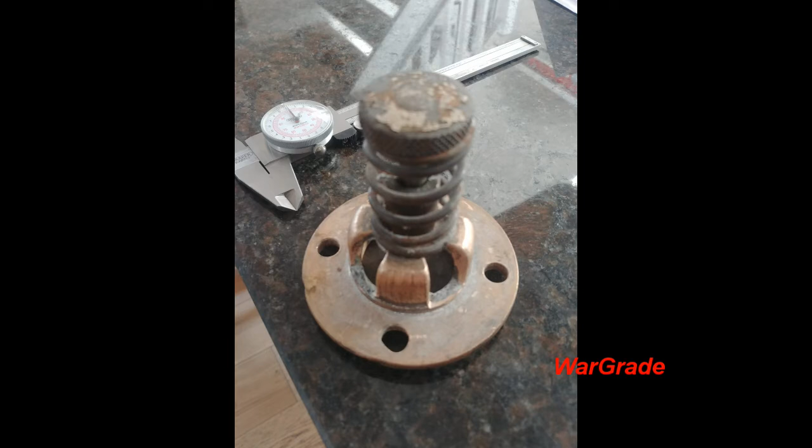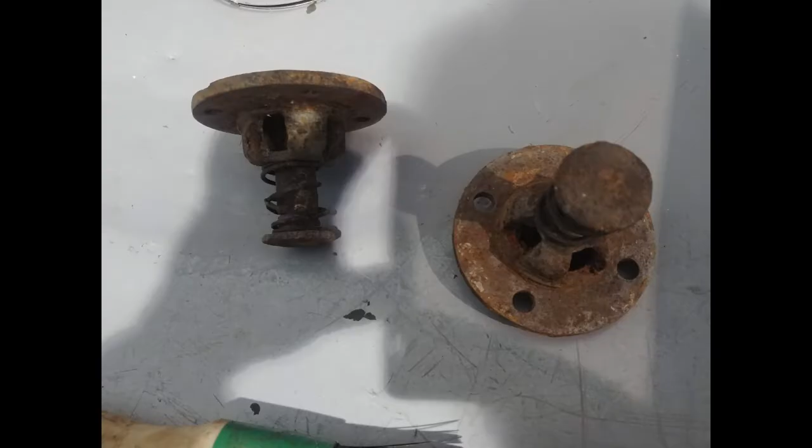So this is the drain bung fitted to the bottom of American World War II tanks. Sherman, Chaffee, Stuart, and I'm sure a few others as well. As you can see, it's in quite poor condition, or the other ones were. This one here is the one I've got to copy, and it's probably the best example I've ever seen, and it still actually works, which is quite amazing really, considering they're well over 75 years old now.

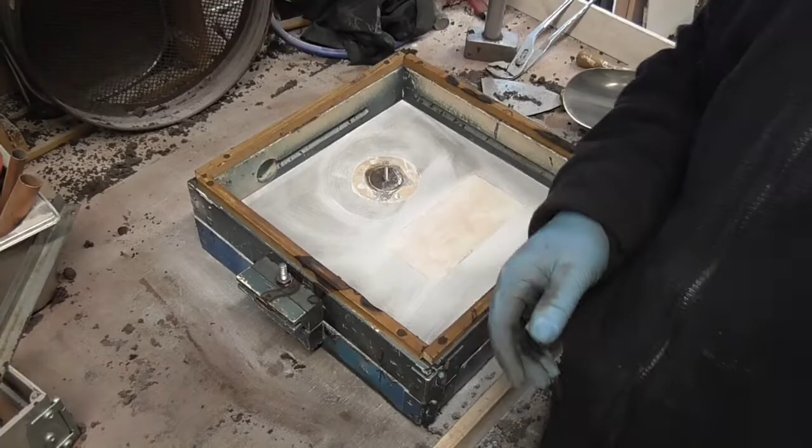Don't you just hate it when you spent the last 20 minutes talking to yourself? Happens to quite a lot of people quite a lot of the time. Yeah, you mainly.

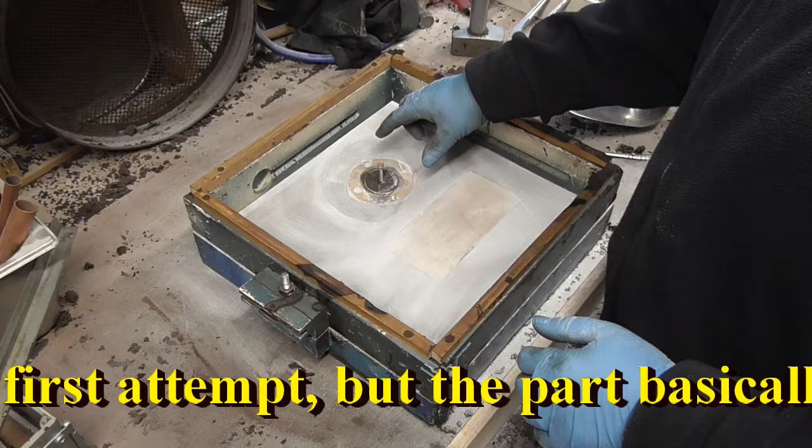So, I've got two experimental casts here. This one I don't expect to come out. It's quite an intricate little part. It's for a World War II tank. I'm going to be casting it in aluminium, as I do, because I've got quite a few of these to make.

And the original one, which is this, is not in too good a condition. So I'm just experimenting with this one to see how it fails, and I'm pretty sure it is going to fail. But I'm going to have a crack at it anyway. I'm doing this one, which should work out. I had a bit of space, I thought, well, I'll give it a go anyway. It's not going to take any more time to do.

In fact, the videos are taking far more time than anything else. But for some reason or other, people are interested in what I do.

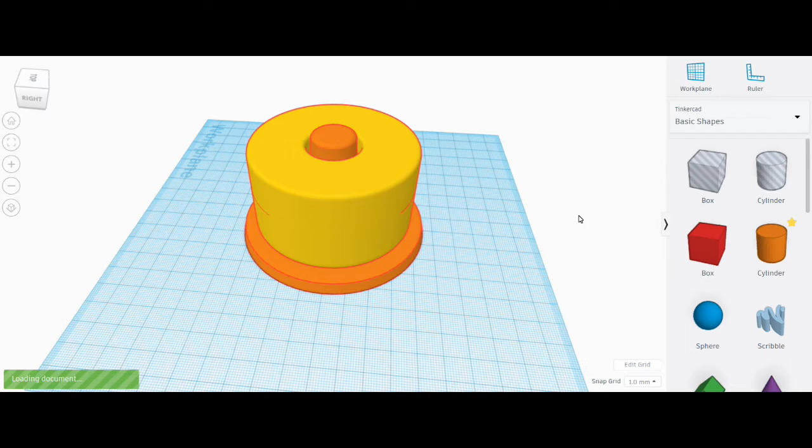As the bit wasn't really castable, I've decided to do a 3D model. This is my first attempt. You can see pretty much here how the parts are put together. You can see on the lower edge angle later on in the picture that I didn't quite get this right. This one would have been a problem to pull from the sand. So eventually I scrapped this and started on the second one.

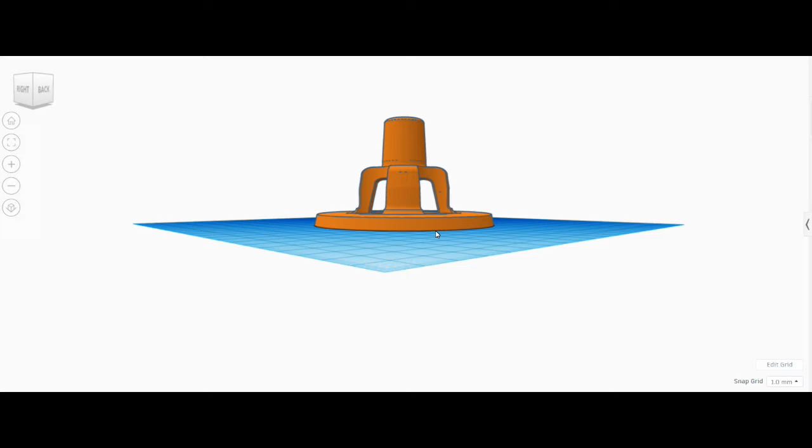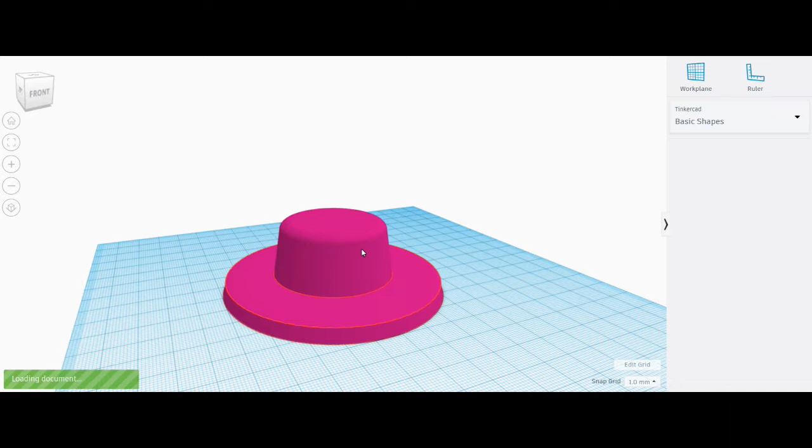So this is the second model. I've got a bit of taper on the main side. I was experimenting with two at the same time, seeing what differences I could get between the two. In the end, the one on the right, which I think will turn purple in a minute, is the one that I end up using. I managed to get a nice rounded contour on the bottom edge. Or should I say, this one became the third pattern.

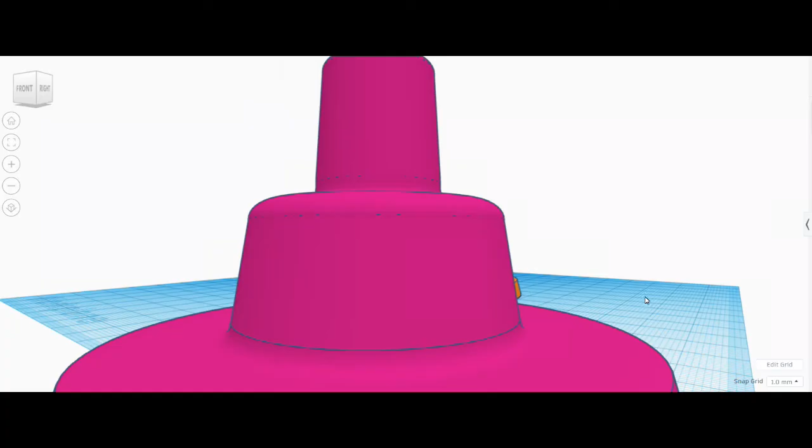The software I've been using was Tinkercad. It's by Autodesk. It's free to use, relatively simple. It's also quite basic. I'm now using Fusion 360.

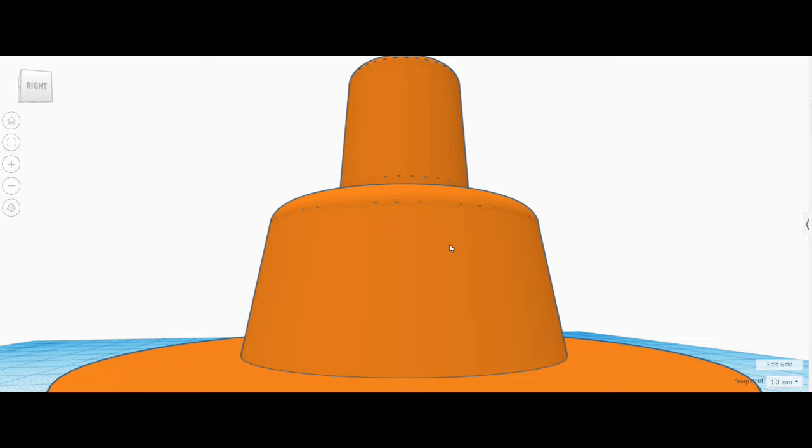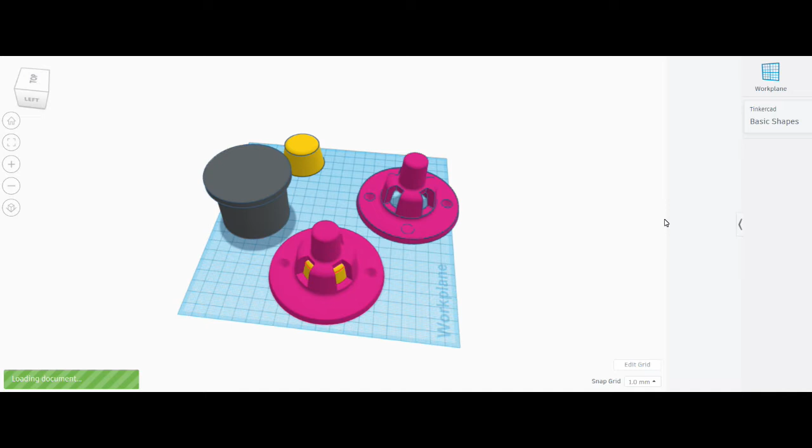So this is number 3. So this gives you a better idea of how the fluting's done. The cutouts there create the fluting, and they're basically hollow versions of the black item which is on the left. The yellow plug you can see at the top of the picture forms the indentation in the bottom, the hollowed section, shall we say, from underneath. The yellow one has got the plug fitted in it currently in this picture. If I turn it over in a second, you'll see

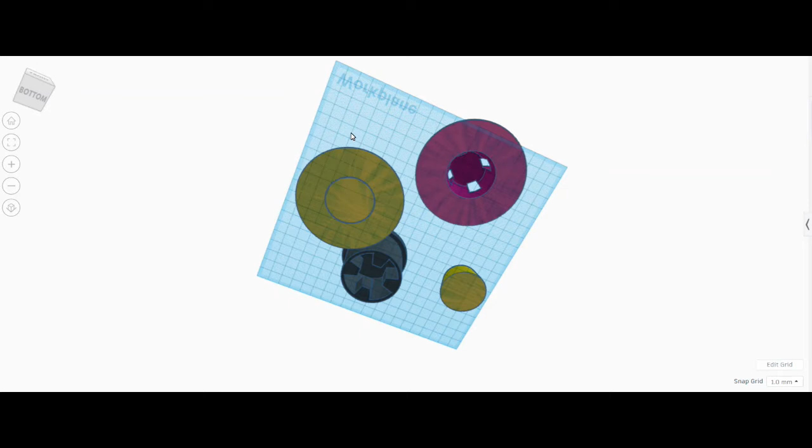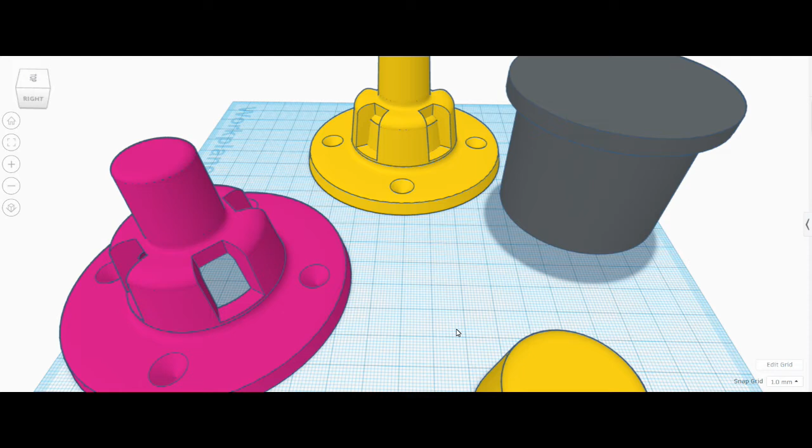There you can see the plug installed, the purple one having been hollowed out. Now the idea was going to ram these up as individual components, much like I did try with the original, but it really wasn't going to work out very well, and I could see it after I'd started playing with it. So I had to come up with a fourth and final version, luckily, which is the one that I later go on to use. And I've done that by basically turning it into a match board.

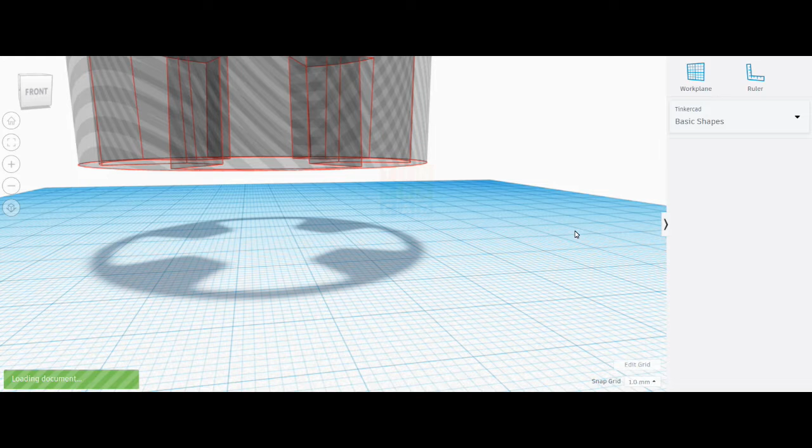So again, here's the component which hollows out the flutes in the top. And you should see it leave those hollows as it disappears in a second.

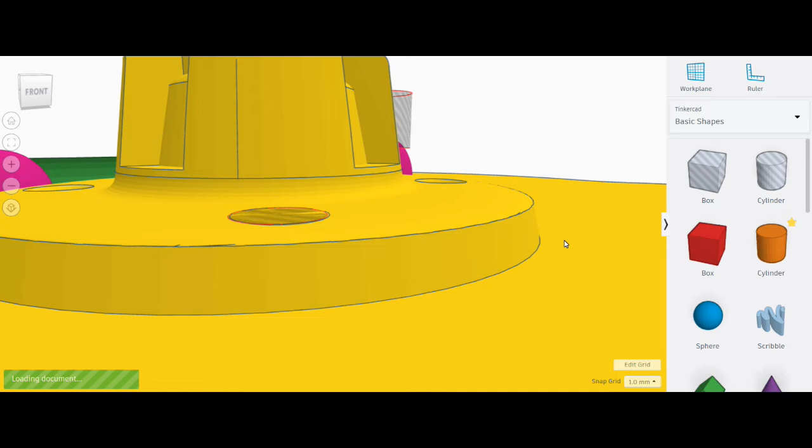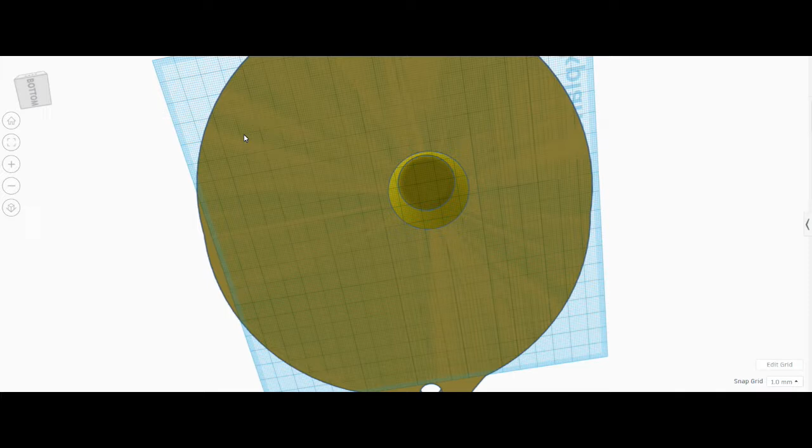So in this example, it looks like the plug is fitted, and to an extent it is, but you have to take into account the thickness of the match board. So when I flip it over, you'll see the hollowed section for the plug at the bottom. So effectively, if you created the same hole without the match board, you'd end up with the part looking like it should do.

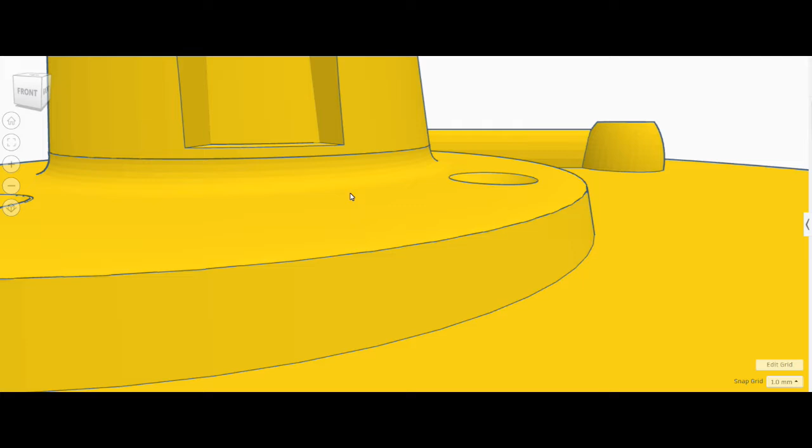The biggest problem I had was the corner of these flutes. I couldn't quite work out how to remove such a sharp edge. I wanted to try and keep them as clean and sharp as I could, but it could have been done a little bit rounder.

The gating system wasn't very good either, really. My first intention was to cast it upside down, but that really wasn't going to be the best way of casting it, so in the end I cast it the right way up. You can actually see it now. I should have not bothered with the gating system, just cut them by hand.

This is a bit of an awkward mould, this one, and it requires a lot of patient finger packing, if that doesn't sound rude. But the shape of it is a bit too sharp and aggressive, really, to be the ideal mould pattern.

But at the moment I've only got 6 of these to produce, so if it was going to be a lot more than that, I think I'd be putting a bit more development into it. And as it is, I've spent enough time on this. But it will work, and it has. And I've already got 3 of these sitting on the bench, and it's just a bit of a difficult one to produce.

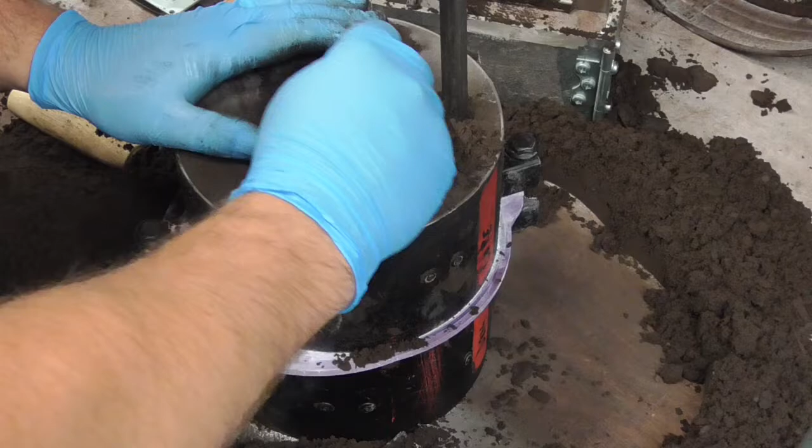Now I found with this part, because it's such a small part, it fills up really quickly. To give me some sort of idea when it's filling up, I've started putting this little overflow area, shall we say. Purely simply because I've had a few spillages where I'm just tipping it in there and it's like, oh, it's full up, overflow.

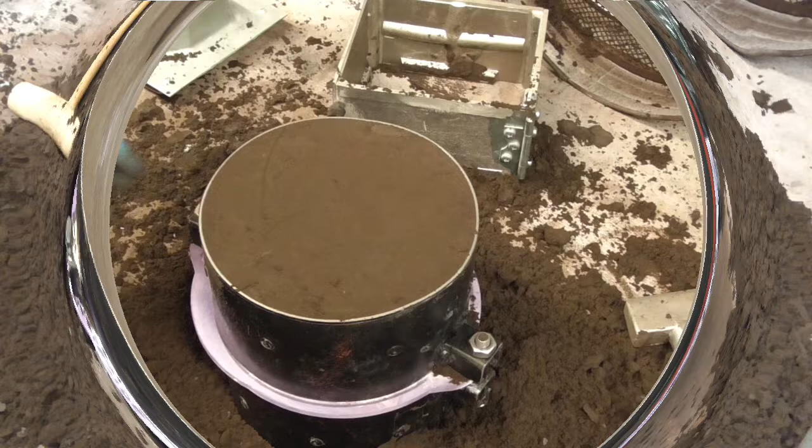And it happens so quickly. The first time I cast one of these, it was like, no, there's no way I've poured any metal in there at all. But it had, and it entirely filled. Very strange pattern.

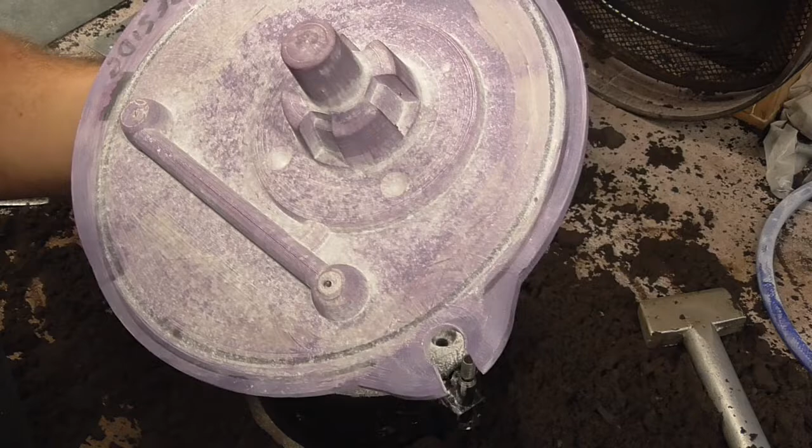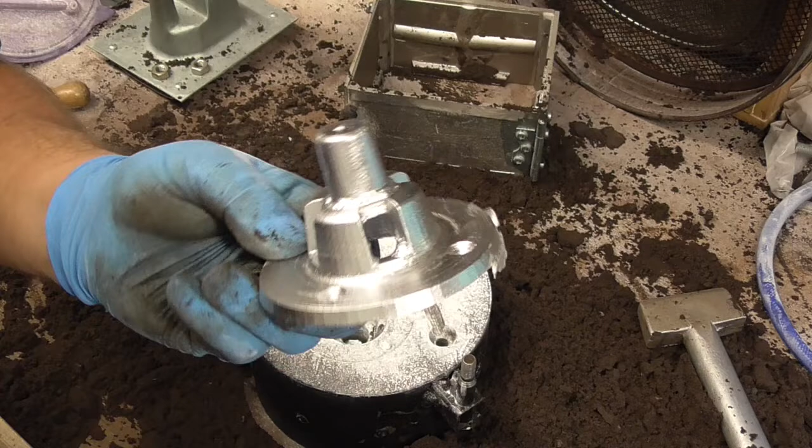Just a minor bit of pull, which is normally the case with this pattern. As you can see, the really sharp contours on the edges here. It's a very awkward cast. To give you some idea, that's a previous cast. And you can see where I've had a little bit of pull on those ones, but it's all got to be machined up anyway afterwards.

So, in hindsight, maybe I should have made it a little bit different, just done these slots machining wise.